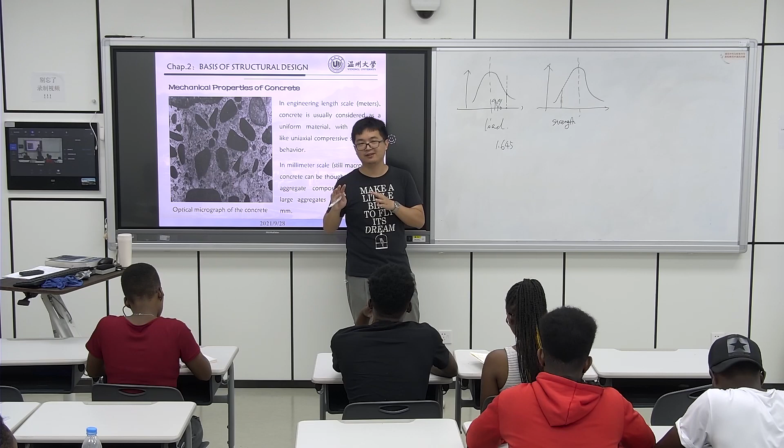Because the data from the test in the laboratory have a deviation, they won't be one true specific value. They fulfill the distribution, but we always choose 95%. This one is the low part, and this one is the high part. So I write here, I hope everyone can remember: the value is the mean, here is a plus, and there is the minus.

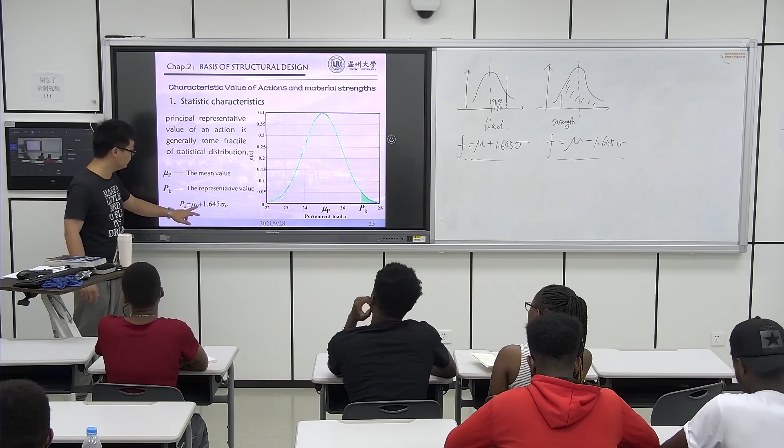Okay? These two formulas, that's the things that... Yeah, okay, look at these figures here. For the load, this is one for the load. They fulfill the normal distribution. And for this represent value, we fulfill this formula, okay? This formula. There is a plus. And the reason why we use the plus is because for load, we want this represent value to contain not all, but 95% of the conditions for the load, this level of load.

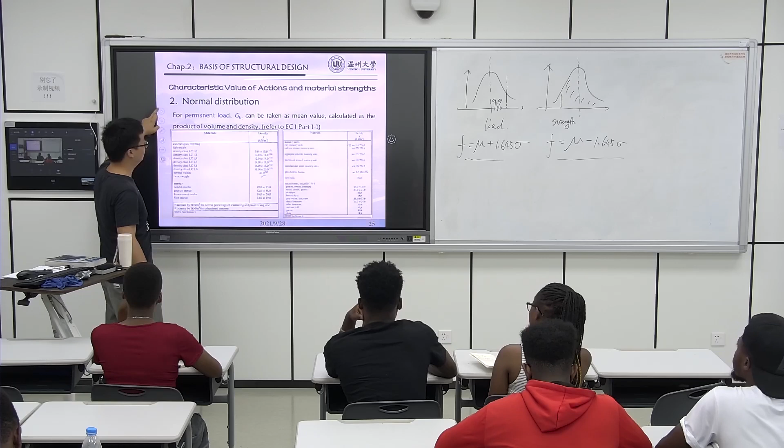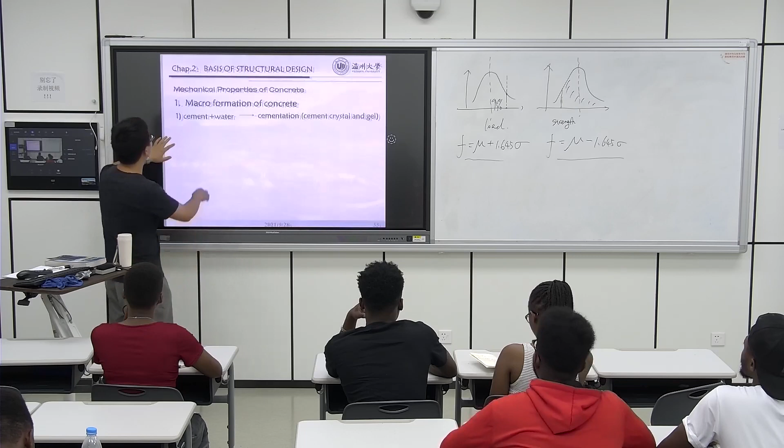Yes. And for material, right? For material, this picture is talking about the concrete, and we choose this value at the low part. How we get this value: this is the mean value and this is the standard deviation, but it is in the low part. And why do we choose this one? Because for the concrete material strength, we want this value to represent this level's conditions for concrete.

Yeah. And in a future class, we will talk about the design, right? There you will know that they all fulfill the normal distribution. This one is the load, right? And this is the material strength. And here is the 95%. This one is the load, and this one is the strength. We hope the buildings and the material do not fail under the load, right? So here we need to make sure that for 95% the material can provide strength.

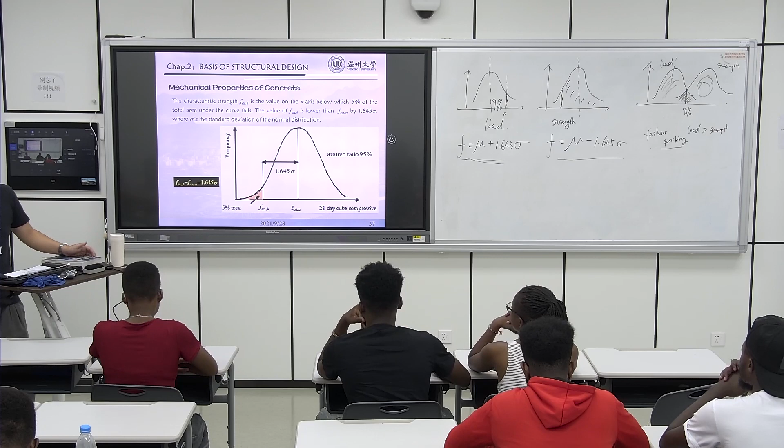It's weak in tension. Look at these figures, okay? These three strengths we need to remember. For cubic, I emphasize that it is only for us to classify the concrete grade, right? For us, just to compare. And for the prism compressive strength, because we do concrete structure design, we will use this strength. And for the tensile strength, I will not say anything about it here, but these two we need to distinguish, right?

Yeah. I asked, does any student have a question? No? Yeah.

Here, these three strengths, we need to remember, okay? And also see the difference. And for cubic compressive strength, in the video, we remember there's a standard specimen, right? And for the size, it's 150. The cube will look like this.

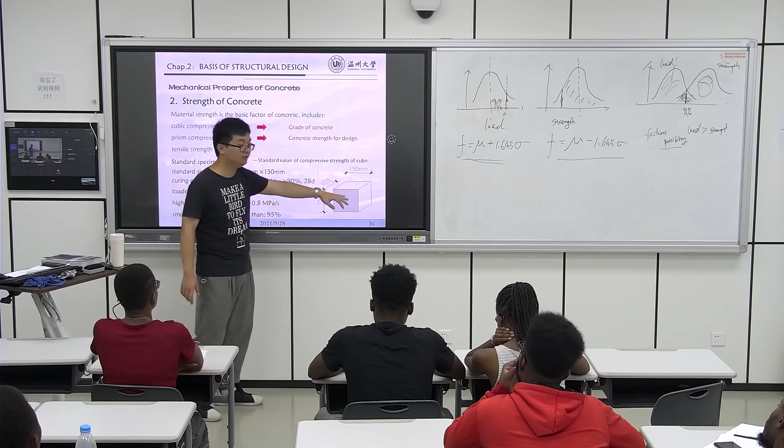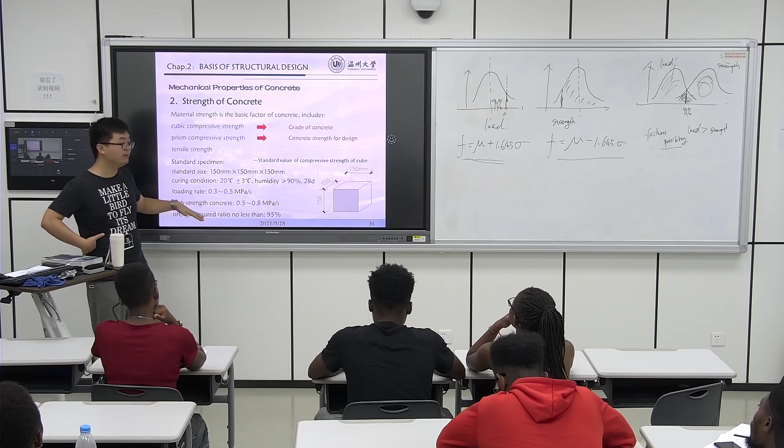And this is the standard size. The curing condition listed here may be a little different from the video, but it doesn't matter, because I captured this information from the Chinese code, and the video uses the Indian code, and it is 27 degrees Celsius. But here, we only need to remember there is a standard temperature and also humidity.

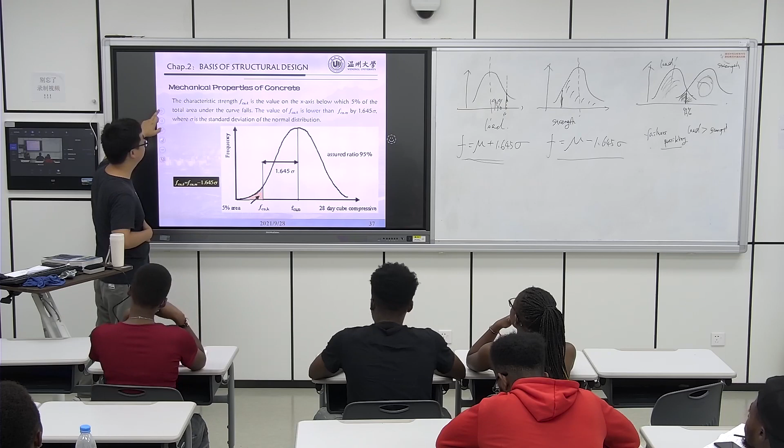And here we talk about the reason why the prism compressive strength is a little smaller than the cubic compressive strength. For the cube, the compression test machine surface touches the specimen, right? For this specimen, the friction will affect the cube. And if we apply some oil to smooth the machine, the failure mode will be like this. So the friction effect is greater with the smaller size.

And the conclusion we need here is that the cubic compressive strength cannot reflect the actual stress state because it's affected by friction, right? And it's only the standard for how different grades of concrete are compared in the cube under the compression machine test. It's only the standard to compare the strength and quality of the concrete under the same standard condition.

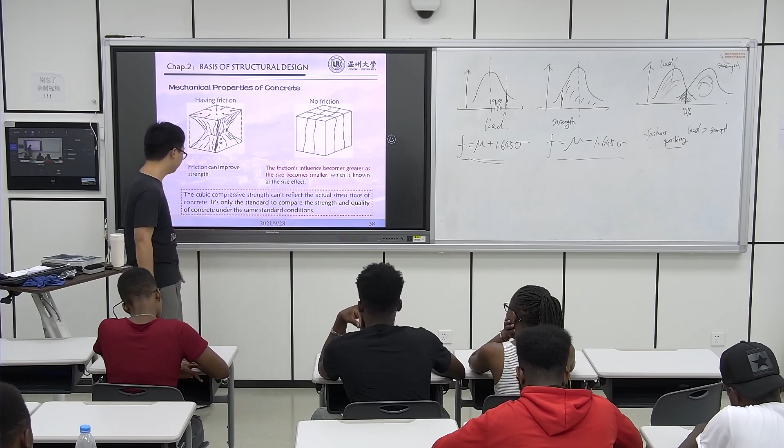So the meaning of the cubic compressive strength is that we do the test, we get this value, and it's only to compare. Because the same cubic specimens suffer the same friction. So different grades of concrete can be compared at the standard size, standard level. Right. So here I talked about why the cube is larger than the prism, and also the cube is affected by friction and by size.

And for the size effect, remember that we use the conversion coefficient to transfer it for comparison. For the larger size, the value we get from the laboratory, we need to multiply by this conversion coefficient. And for the smaller specimen, the value we get, we need to multiply by this coefficient. And in America and Japan, they do not use the cube, they use the cylinder as the standard specimen. The diameters are listed here for your reference. That's the difference between countries.

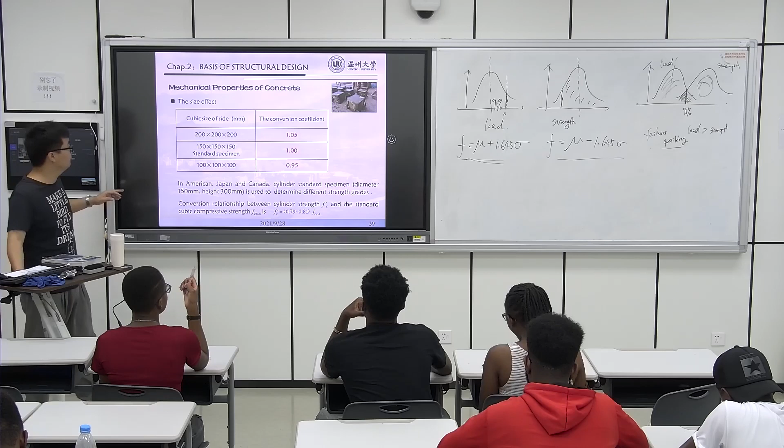And here, I want to see if students have questions or not about this part on the cubic compressive strength. No problem. Yeah. We will go to prism compressive strength.

Yeah, and there is another thing. When we get the cubic compressive strength, right, the levels may be 20, 25, 30, up to 80, right? And here, there is a critical value for us to judge. For concrete whose cubic compressive strength is less than C50, we call it normal strength concrete. And for concrete whose cubic compressive strength is larger than 50, this type of concrete is high strength concrete.

And later we will use this concept. Okay? We will use this concept. Yeah, also here there's no less than 95%. So that's the reason why we choose the lower part.

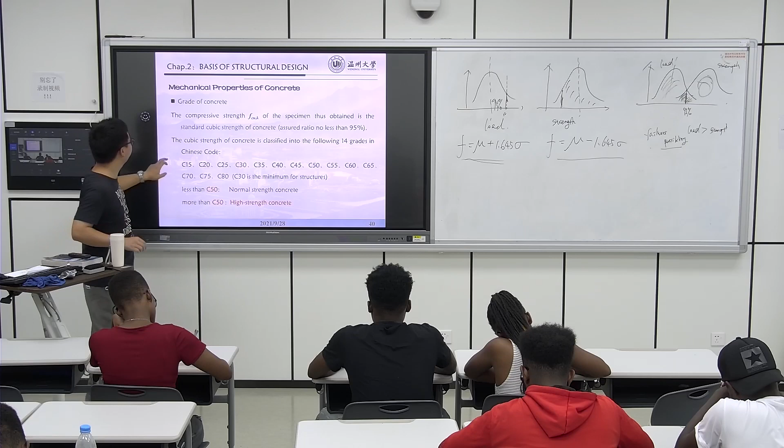Okay, in the next section, we will talk about prism compressive strength. Okay? For the prism compressive strength, what we know now is that for this specimen under the compression test machine, the compressive strength is smaller than the cube, because it's not affected by friction. Yes. Okay.

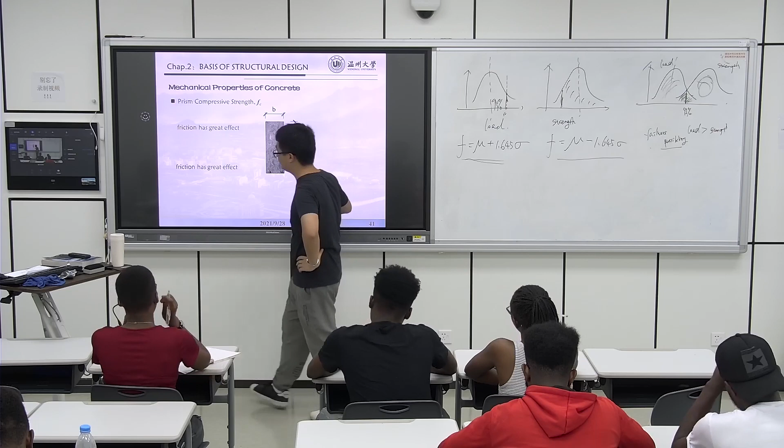Because for the prism strength, this size is the B, and the H is the height. Between the width and the height there is about a 3 times relation. For the cube, the height is 1 divided by 1. But for the prism specimen, what we get here is the height is 3 times the width. Okay.

My student can give some response.

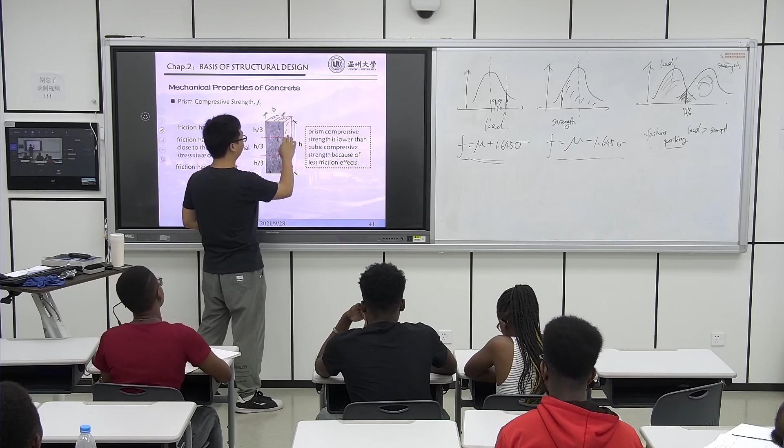Here we just see it in this view, but exactly the height is 3 times the width. The friction may affect this part, and in the middle part, this concrete is not affected by the friction. Look here, friction has a great effect. In the middle part, the friction has a smaller effect, because in this middle section,

it's close to the actual uniaxial stress state of concrete. So for this part, the value we get is close to the real, actual stress state. That's the reason why we use this compressive strength in structural design, right? Yeah. Can you imagine? This is the machine, right? This one touches the machine, and this also touches the machine, and gives it the compression.

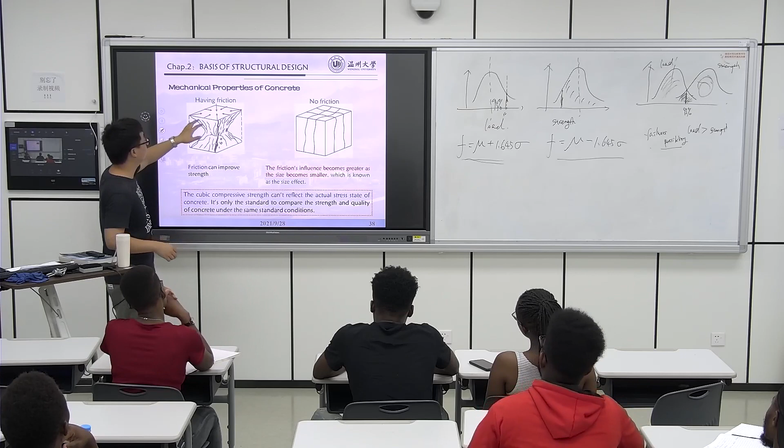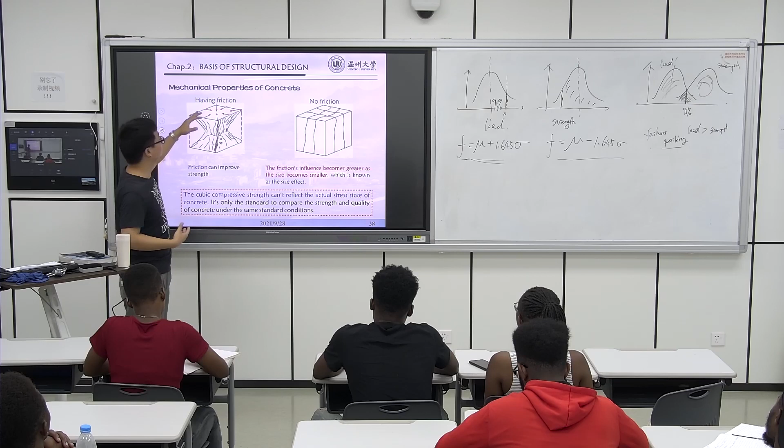Look at these figures, okay? Because the machine touches this surface, it gives the friction effect, right? Look here. If you give it compression and there's no friction, the failure will look like this. The crack will develop vertically. But with friction from the machine, when it touches this surface, the surface will apply force on it. So when we give the compression, the crack develops like this. They do not develop vertically.

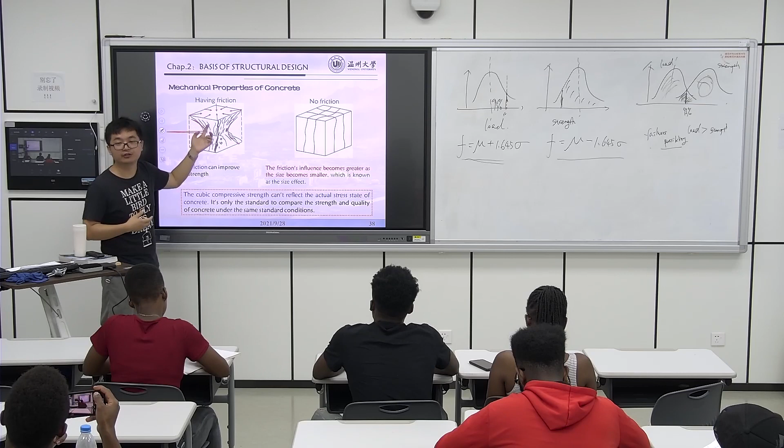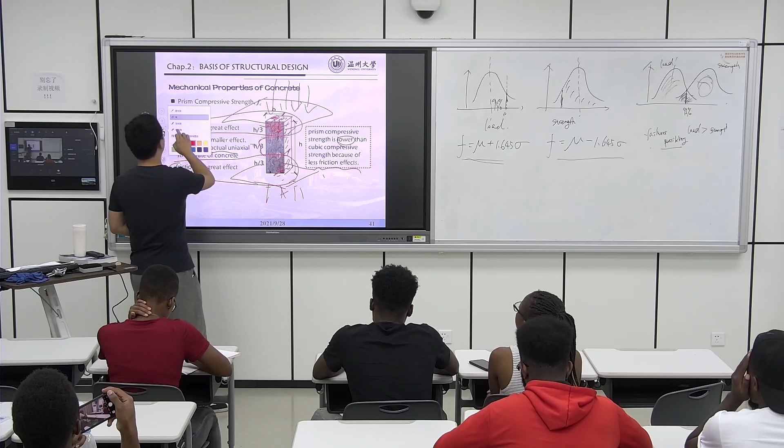So we name this phenomenon the friction effect. And look here. For the prism specimen, this surface of course will be affected, right? The stress, the force, is just like a wave. It transfers. And here in the middle part, we do not see it. There is no friction effect; compared with this part and this part, it's less affected by the friction. So that's the reason why the prism compressive stress values from the test are less than the cube.

And the specimen's standard size I list here. And the height is 450. It's 3 times the width. So it's okay?

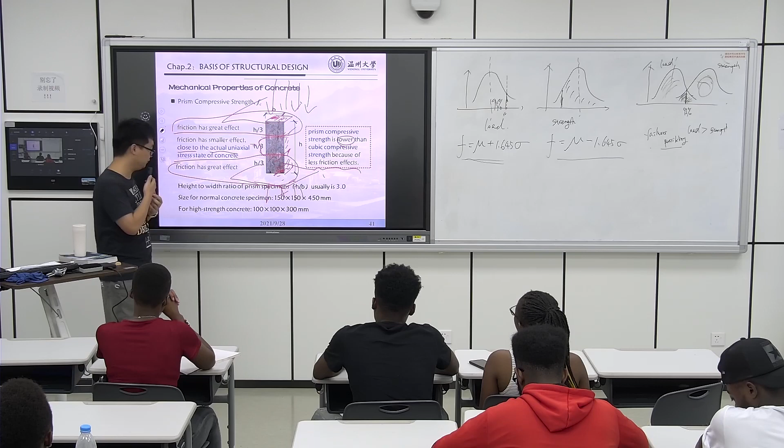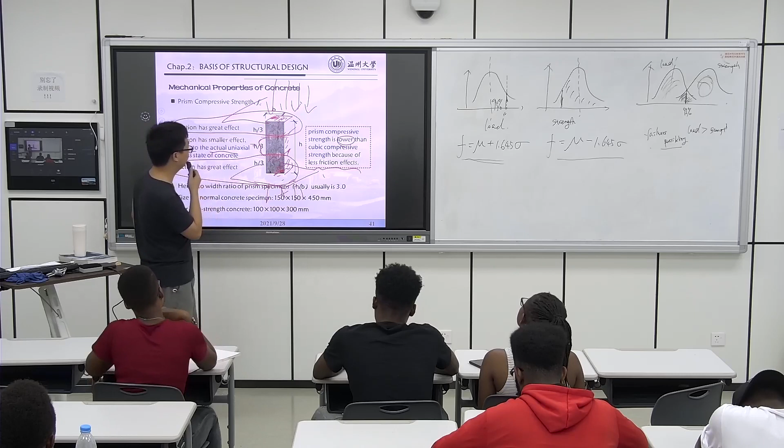Okay. If you have a question, we can discuss after class. Thank you. Just ask the questions, right? Usually 3.0.

And look here. This is the engineer doing the prism compression test, right? We put this specimen under the machine. And also some other countries like Japan use the cylinder.

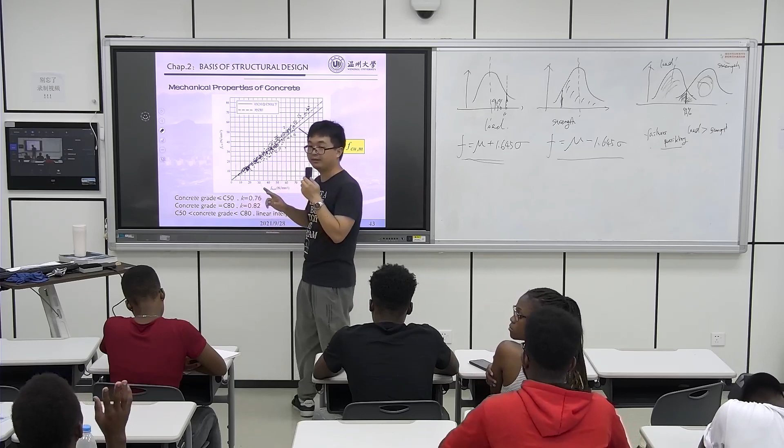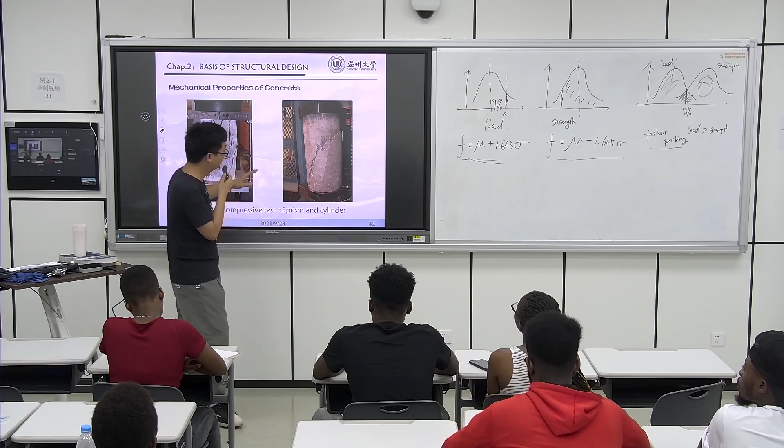And look here. There are 2 types. Okay, you see. Can I take this one? Okay. Yes, sir. Where? This one? So this is like the cylinder and that one. Yeah, cylinder. What's wrong? Oh, okay, I see. It's okay.

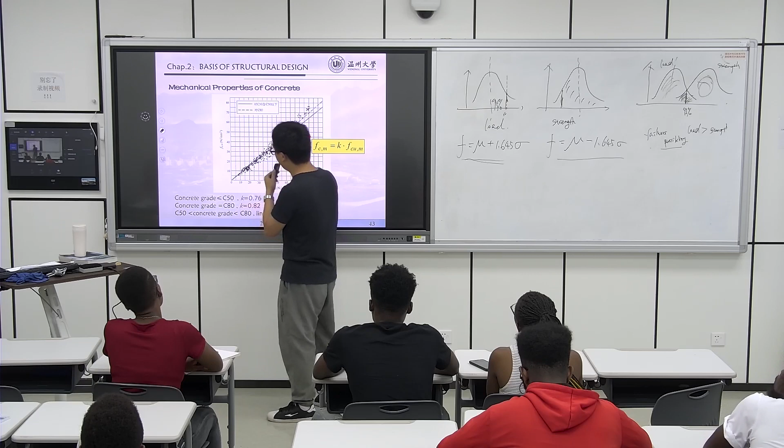Before, I mentioned grade 50 is the normal concrete, right? Above it is higher strength concrete, below is normal strength concrete. People did a lot of tests and built the relation between prism compressive strength and cube compressive strength, right? But the coefficient they found differs for normal strength concrete. This is the linear formula. This one is the cube, this one is the prism. They have a relationship from these figures.

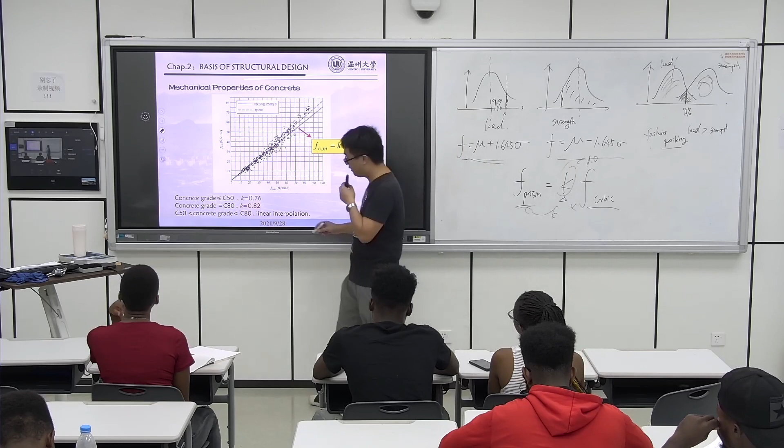And the coefficient K here: because we know the prism compressive strength is less than the cube, this coefficient must be smaller than 1, right? Then they multiply. The scientists did the tests, collected the values and built this relationship. For normal strength concrete, the coefficient K is 0.76, and for high strength concrete, K is around 0.8. So the cube compressive strength and the prism compressive strength have a relation of around 0.7 to 0.8.

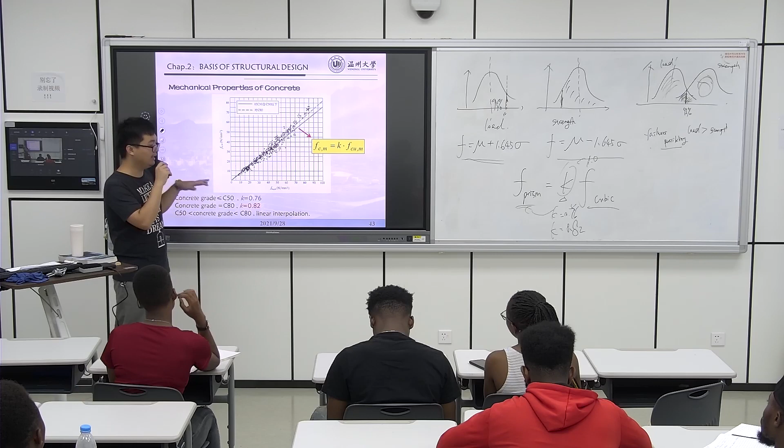Okay. These figures we get from the laboratory. We do a lot of experiments on the specimens, varying the ingredients, proportions, and everything, and they test the strength and build this relationship.